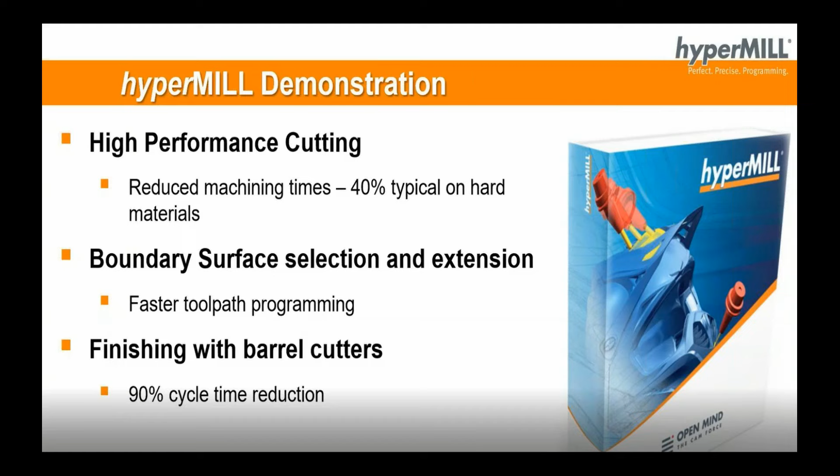Yeah, so today we're looking at high performance cutting. We're just going to be doing a couple of examples comparing traditional cutting styles with what we call our MAXX machining package with the high performance cutting. I hope you all can see my model on the screen. Square model, brilliant. So what I've got showing here in the middle, in this cavity, is a traditional style roughing tool, offsetting from the last boundary hit into a plunge point in the center.

Typically, with this type of toolpath, you get heavy wear on tool, you get rest machining loops, you get full width slotting. All these can have a real negative effect on tool and the machine. With this type of toolpath as well, you're generally quite slow on feed and speed.

You have helical moves into the material, which require axial forces going out of the materials. It's not ideal.

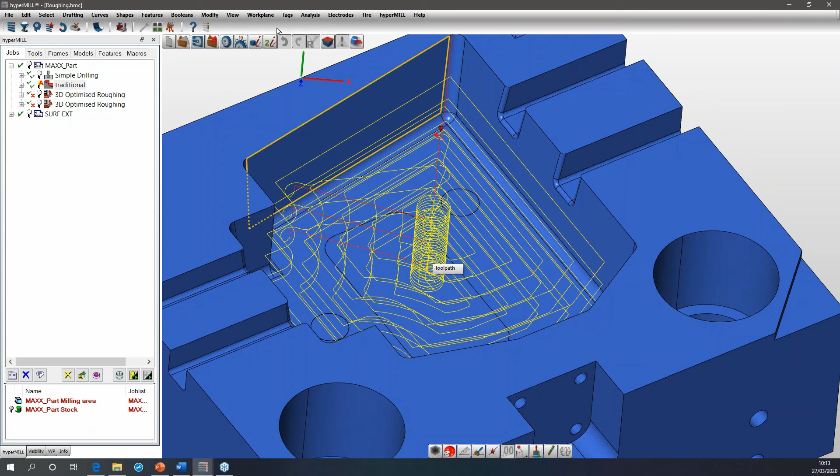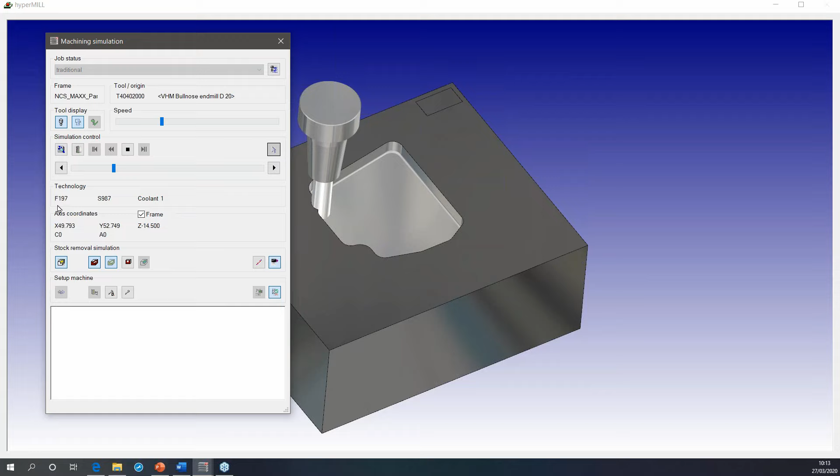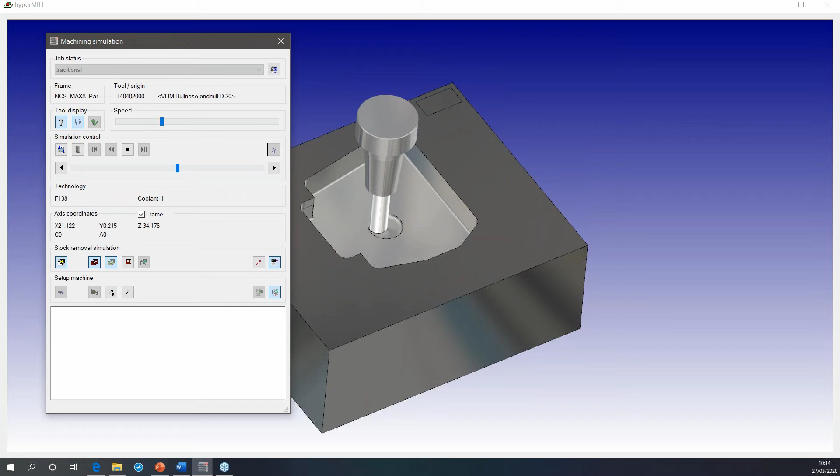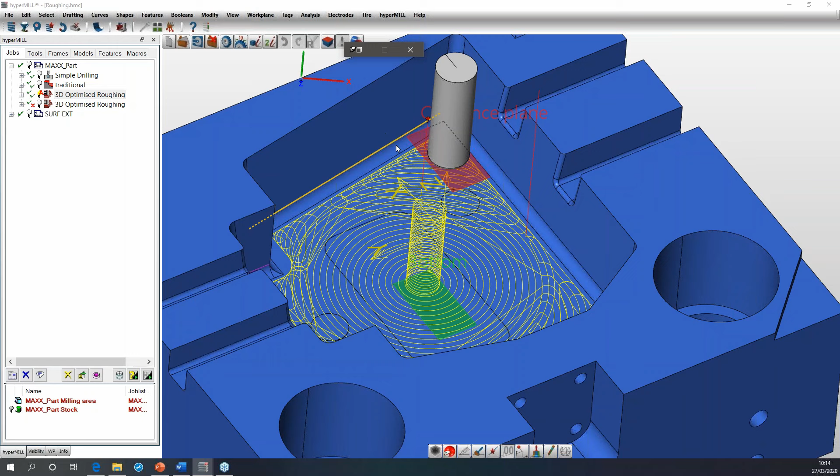MAXX machining in our cycles can be as simple as turning it on in the cycle and pressing calculate. So this will focus on producing.

Trochoidal milling has various benefits. MAXX machining is overall a better toolpath style, and it's far more consistent with the latest machinery capabilities. This style of toolpath has even pushed tooling to produce better geometries.

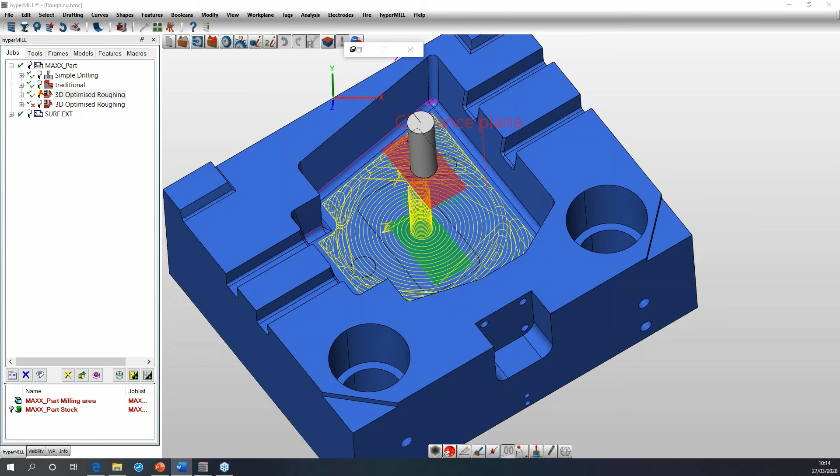The difference is we use feed rate adaptation compared to the traditional high performance cutting, which is varying engagement. If I look at this toolpath here, the big spiral opening pocket and dense area, I'm not changing the engagement into the material.

MAXX machining adapts the feed rate to maintain a constant metal removal rate. This results in constant cutting forces, which is the one, if not the most important thing in quick roughing operations, the removal rate.

This not only produces constant machine loads, but can uniform the chip thickness. Uniforming the chip thickness can result in excellent heat evacuation into the chip instead of the tool. So we're gaining on tool life here.

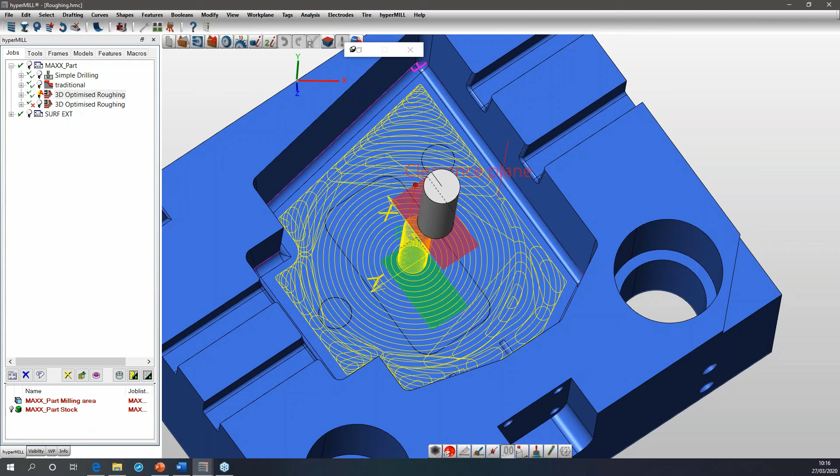This style of toolpath is changing the way we machine. Combined with the constant feed rate, we are adapting the toolpath to use the full flute of the tool. Using the full flute of the tool produces a much nicer scenario.

We are entering grounds of using side radial load much closer to the holder. That, combined with a full depth of cut and a low radial engagement, produces a better scenario whereby the surface speed and even feed per tooth can be ramped up substantially,

while keeping the cutting forces low to maximise tool life. High performance cutting paths from hyperMILL will generally have an overall shorter tool path, and you're machining the material faster. So it's win-win all the way around.

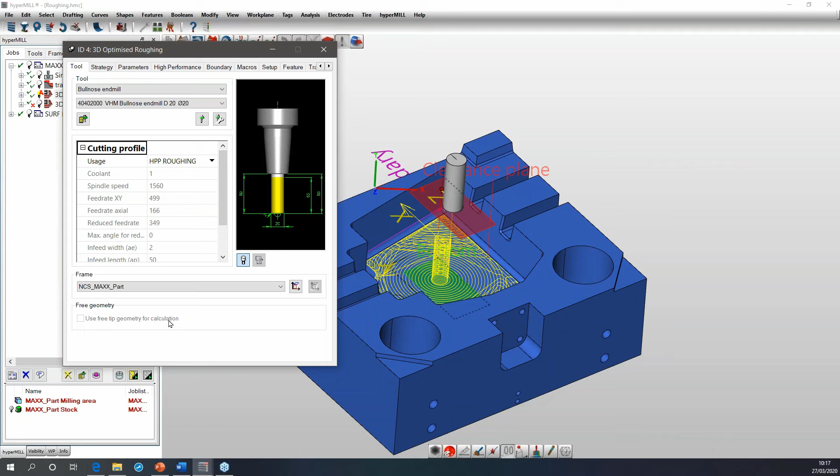So if I was to simulate how the material is removed using our high performance, okay, in this particular scenario, I still do have a plunge, but that can be removed. I can pre-drill a point.

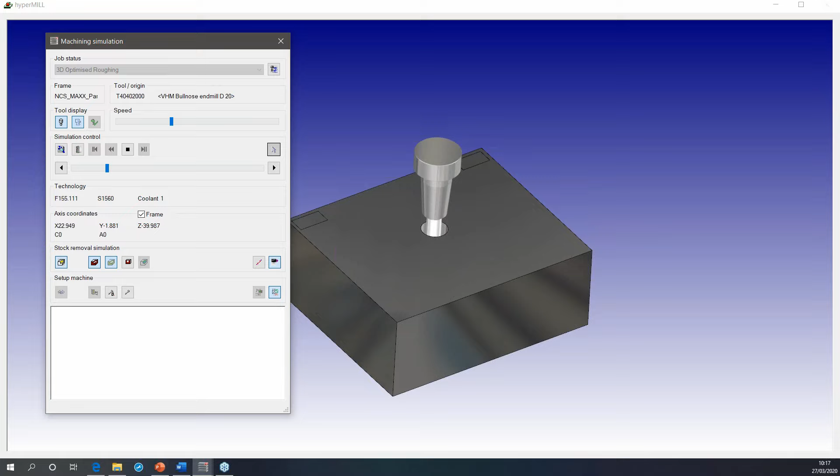So I'm using the full length of the tool and it's spiraling out, maximizing the flute length of that tool. So you get an equal wear, you're getting the most out of the tool possible.

You can see the feed rate is constantly adapting to suit the scenario. There's a real nice function whereby as it's entering the material, it actually slows down so you do not shock the tool. That's very important when you're machining hard materials.

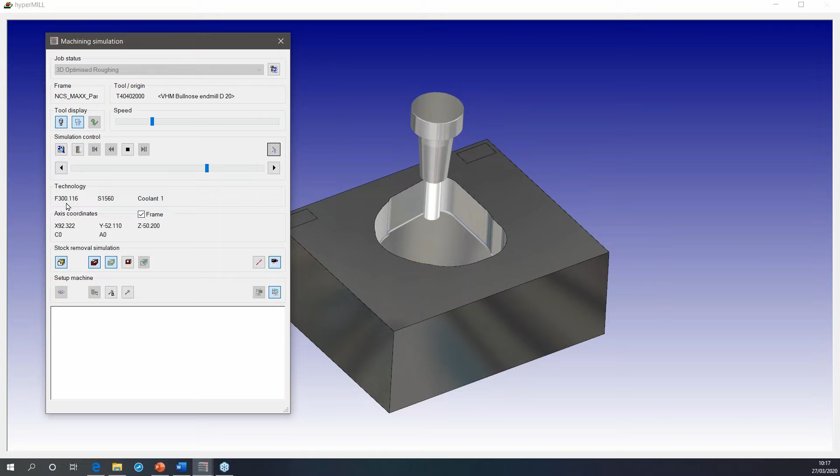Once it's engaged into cut, it then speeds back up. So this is feed rate adaptation on engagement.

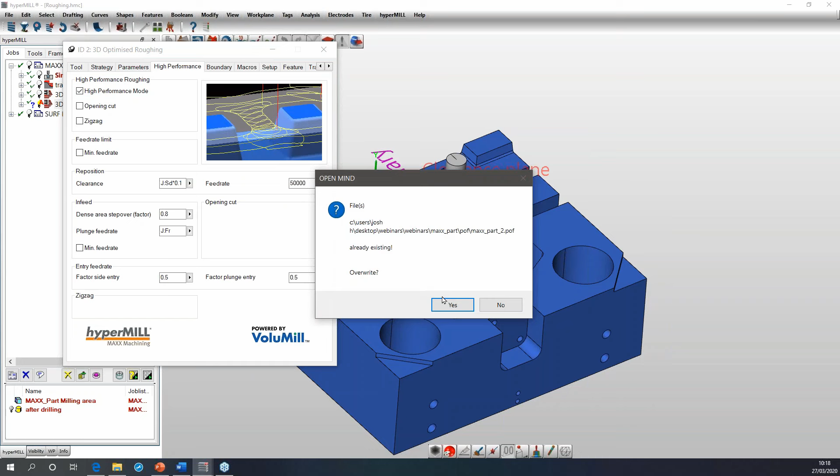In this little pocket here, I did set up an example as well where actually I did pre-drill a point in the middle and used high performance there, which also produced better gains, and I'll show you the difference in a moment. Okay, because this is the nice way to get this set up.

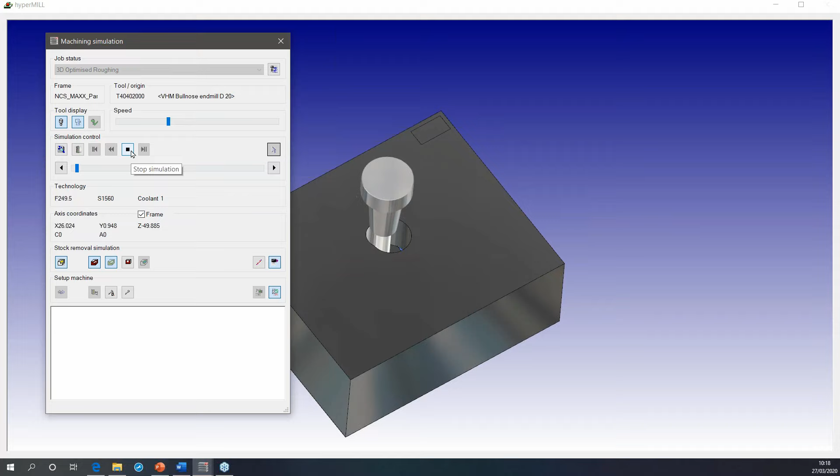Okay, so with this toolpath, I've already pre-drilled a hole. Maybe use a U-drill, something smaller. That means I can plunge straight to depth and I do not get the helical move, and I'm straight into the trochoidal. Really maximizing what that tool can do.

So I'm just going to show statistics wise. Now this is using recommended speeds and feeds for the traditional toolpath: 52 minutes for this pocket. Granted, it's quite a large pocket.

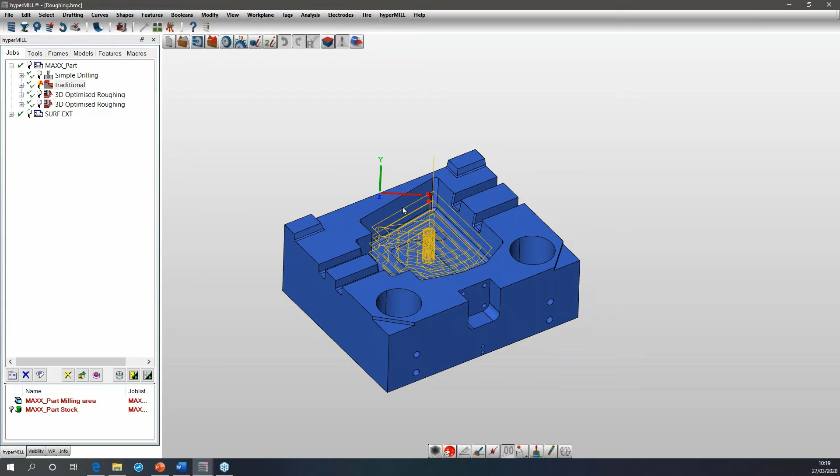Okay, and I'm treating it as stainless, so yeah, there's going to be... here we go, it's a 160 odd mil pocket. So 52 minutes to rough that out.

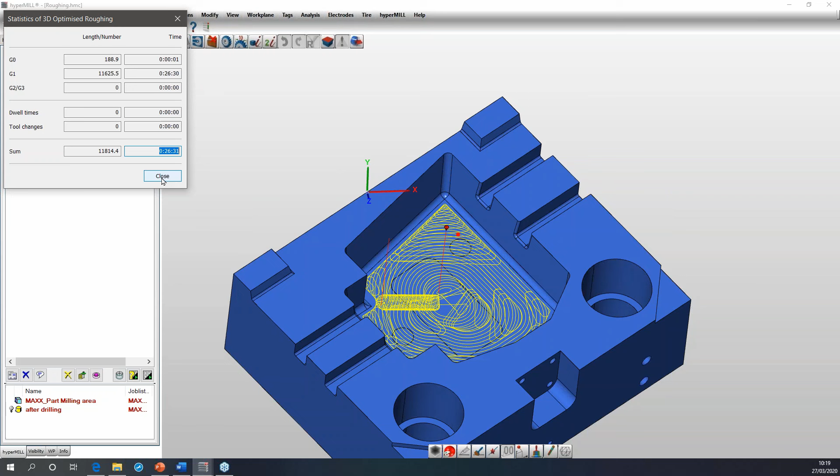Using high performance statistics, over 50% less time in that pocket. 26 minutes now, 26 and a half minutes cam time. So huge advantage there. Plus, not to mention, nice scenario on the machine.

It's lower cutting forces, and you're utilizing the tool better. There's geometries out there now from several manufacturers that have real specific designs and helix angles on these tools and chip breakers that really do optimize and allow you to achieve faster surface speeds.

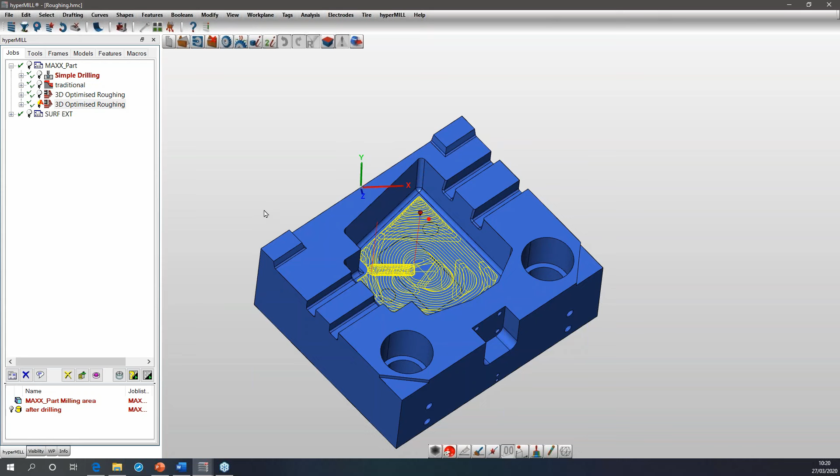On this example here, the traditional style toolpath, we were running at 62 surface speed and 50 microns per tooth. For the trochoidal, I can run at 98 surface speed and 80 microns per tooth.

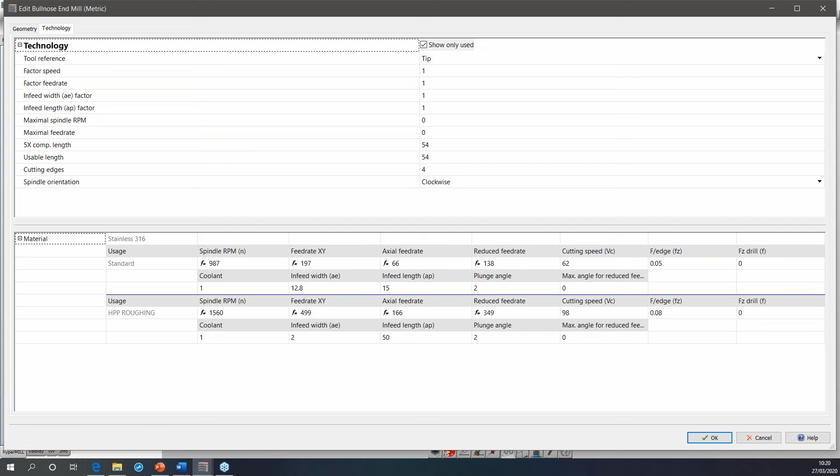So that's a factor of 1.5 times on VC, and over 2.5 times faster, more metal removal on the FZ, the feed per edge. So massive gains to be had there.

This style of toolpath was originally developed for hard materials, but it can be utilized in softer materials as well. Tooling is allowing that scenario to happen now. The original idea of this high performance MAXX toolpath was for harder materials, but tooling geometries these days are really enabling us to use this MAXX machining in all areas, which is quite nice.

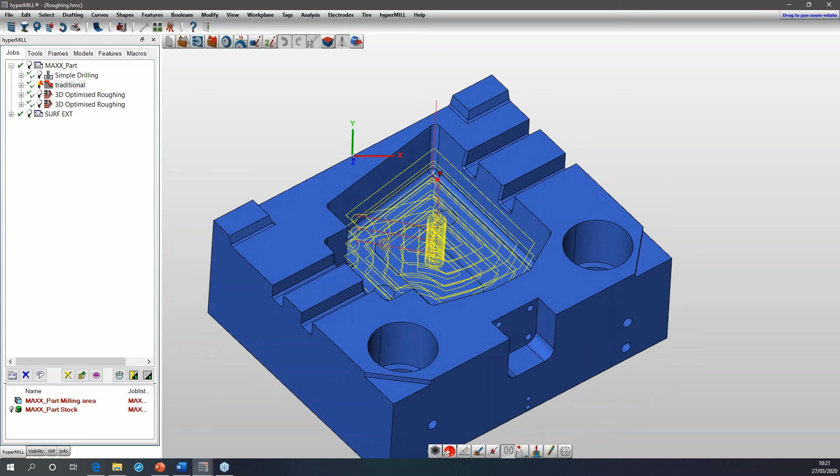Okay, I'm just going to move on to a slightly different aspect now. I'm going to use the same part for now, just because it's got a nice little section on it, and I'm just going to focus on these slots.

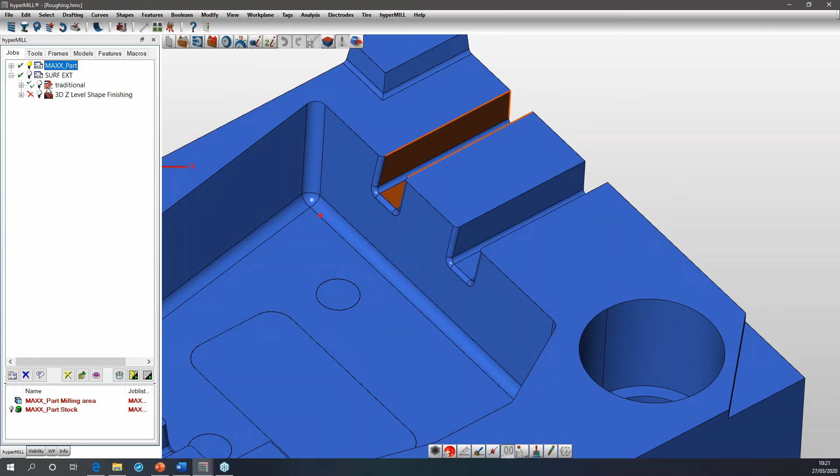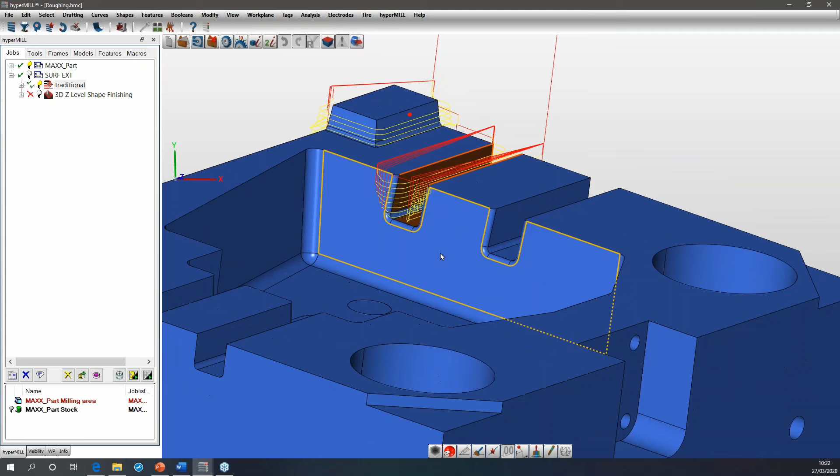When we're doing Z level or constant Z based cycles, you get typical scenarios whereby in this open slot case, the tool will naturally want to wrap around the edge. You get this wraparound, and it's unoptimized. If you had a stock scenario inside that pocket, that's going to be gouging in, causing pre-machining to occur.

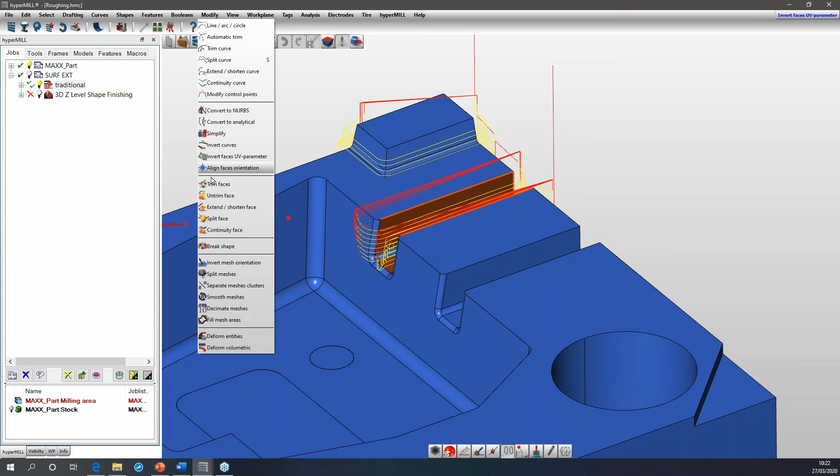Takes time, takes effort. We do have tools, of course, that can help. We have our extend and shorten face command, which is a real nice solution for extending the surfaces out, and it can eliminate the wraparound.

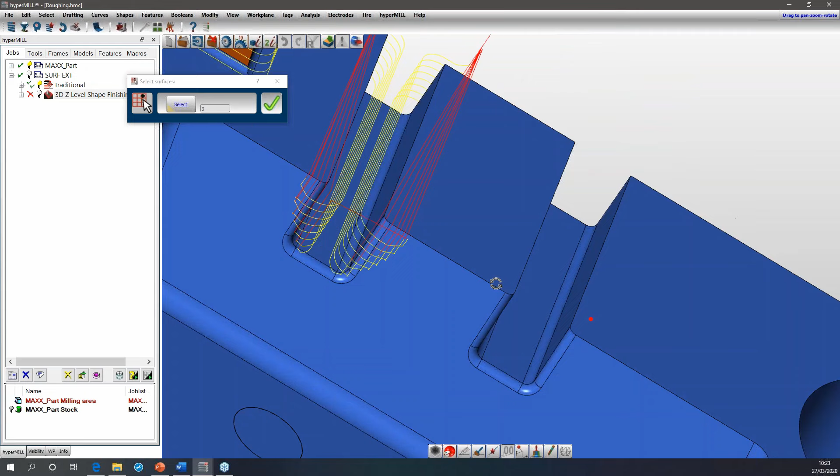But HyperMILL cycles are developing rapidly, and we have options in our cycles now where we actually get automatic surface extension occurring. We are bringing HyperMILL functions into the cycle for an automated result.

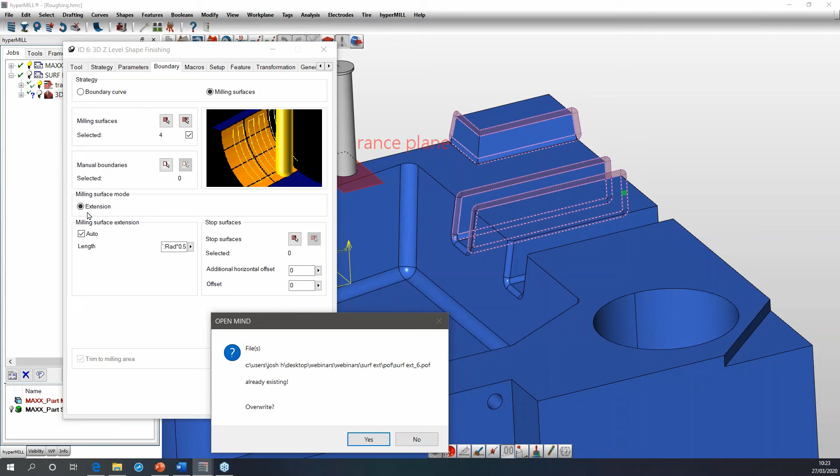Quick, simple, saving time. If I was to just press calculate on this now, a nice thing here is I've actually, instead of creating boundary curves and controlling the tool using boundaries, selected milling surfaces. I've said, just mill these surfaces. Through that selection, I've got an automated surface extension, done by a formula. This allows several types, all types or sizes of tool to achieve the same result.

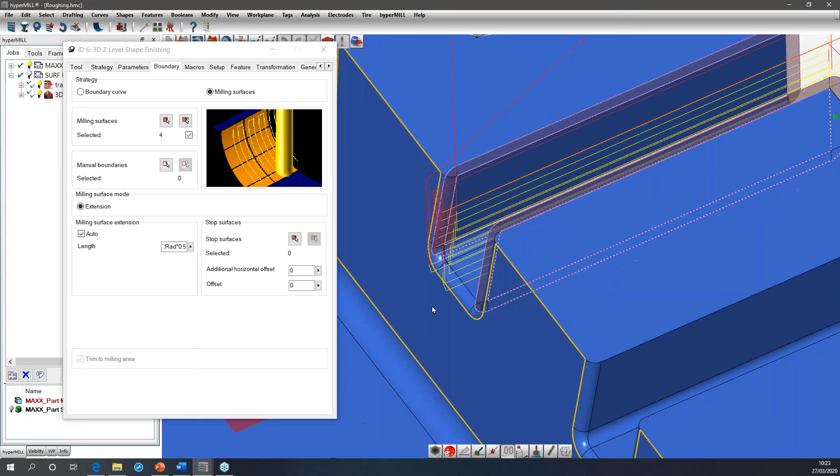So you can see now with that surface extension, optimized tangential entry and exit out of the material, no wraparound. Really nice there. And that's just an option - you just pick your surfaces and hey presto, milling surfaces mode done for you.

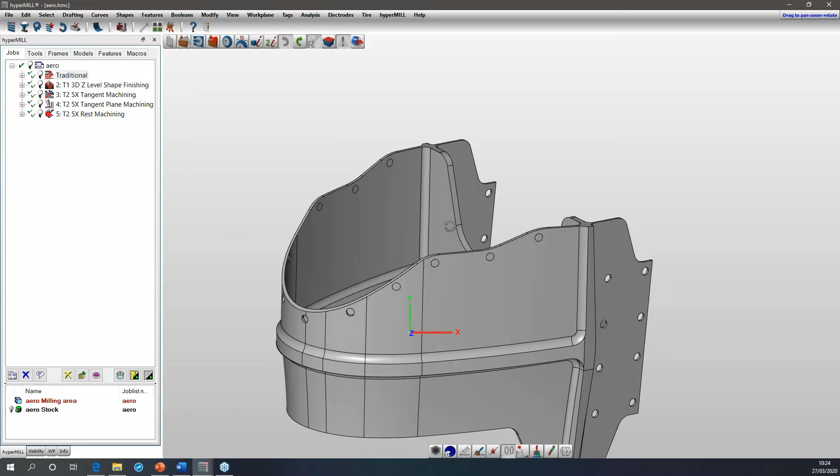Marvelous. I've actually got another scenario for this. Now this is obviously quite a hefty part, but I'm just using it because it shows the power quite well.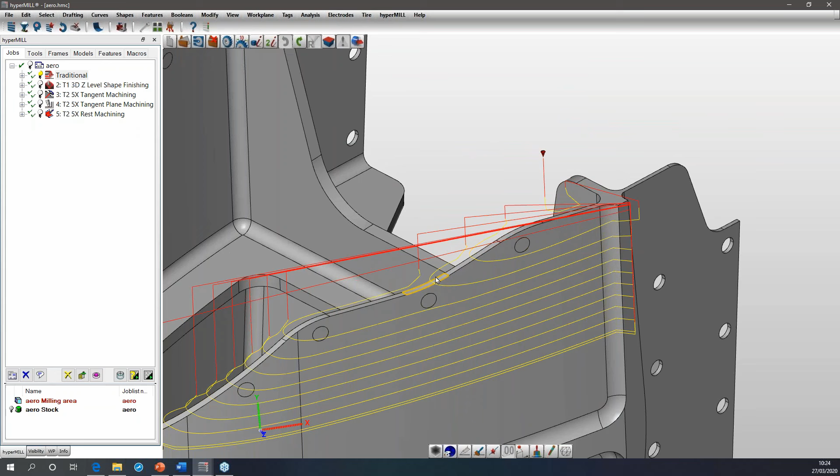Z-level style toolpath down this cylinder. You get the wraparound over the top. Yes, you could offset the top face a bit and stop it rolling over, but this is all time and effort. This is all being controlled now within the cycle.

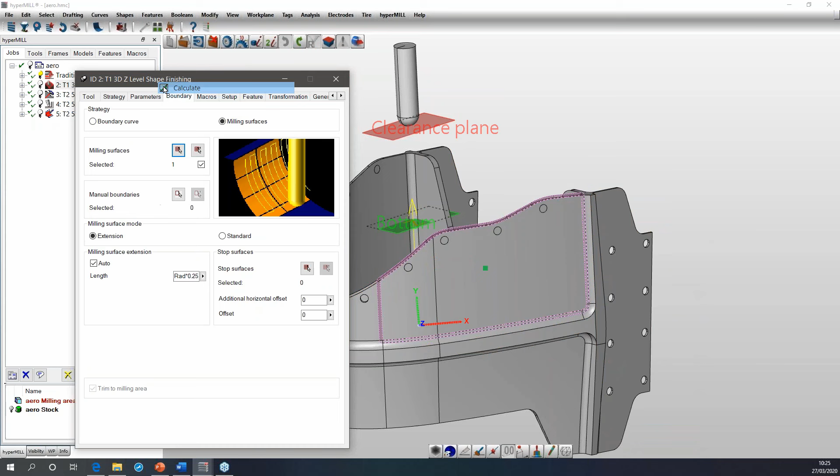I select my face that I want to machine, press OK. I get my surface extension all the way around. I press calculate. Now I'm using the same sort of step overs and whatnot as the previous toolpath, but you can see it's completely eliminated the wraparound in this area. So again, really nice, powerful solution here.

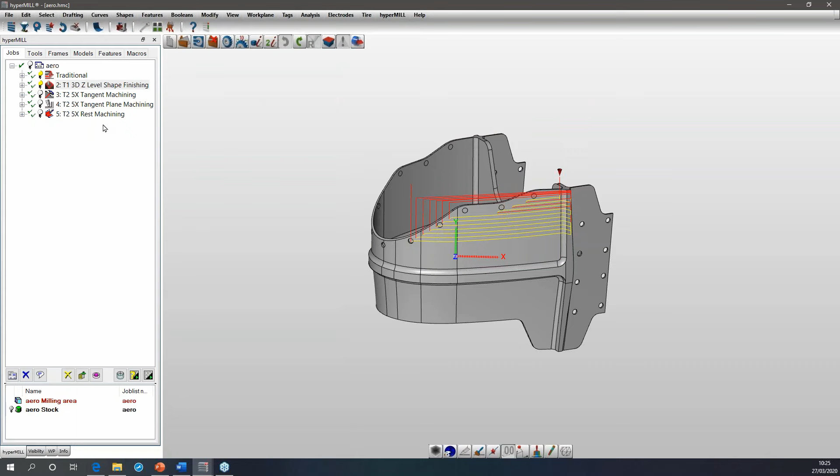So it's not just for Z-level areas. We do have the availability also in flat area machining, so the profile finishing side of things. Traditionally, you get the tool rolling off the edge.

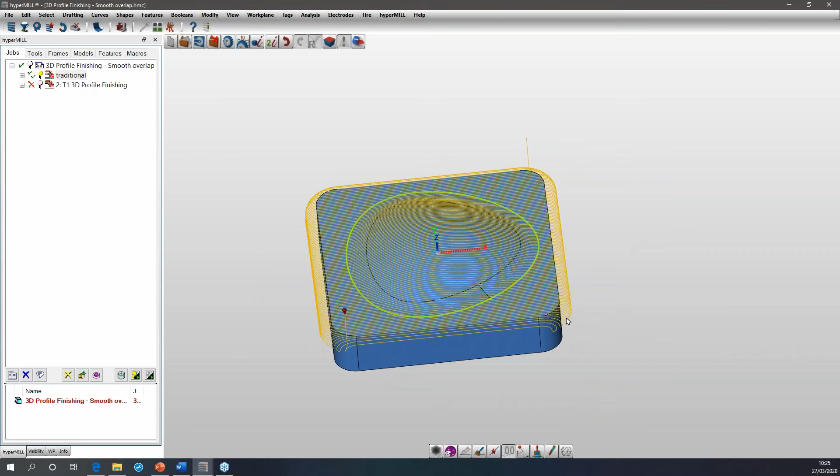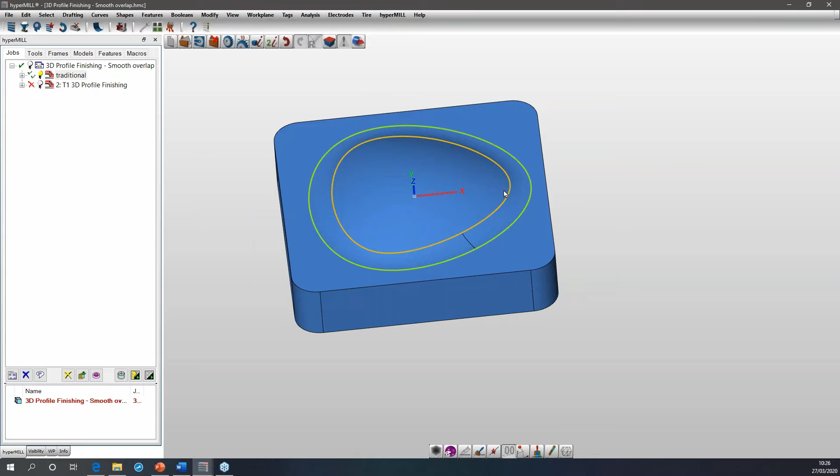To stop this, you could set a boundary, but if you set a boundary to the edge of the surface, you're entering grounds of the machine speeding up and slowing down, doing step over all on the part, which you can improve certainly in open areas by having an extension off of the surface that you're machining. You get much better edge behavior, and you're maintaining surface speed correctly when you're milling those surfaces.

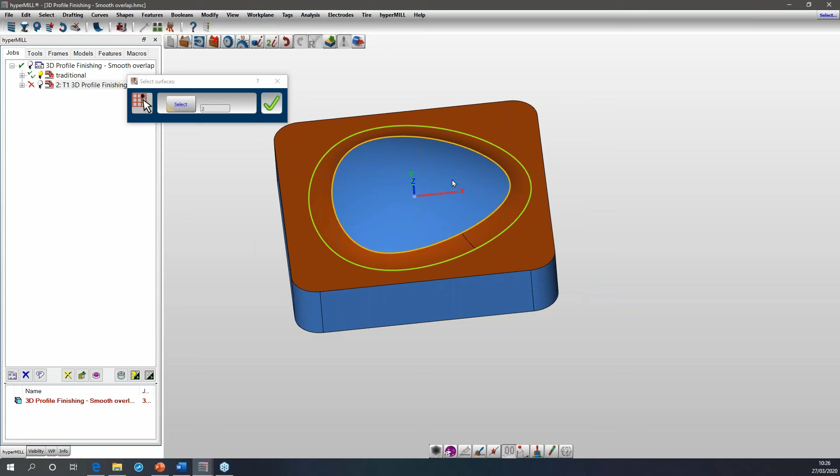So again, we have a nice scenario where I can use milling surfaces for my selection. I can say, yeah, I want to mill these surfaces, okay. And instantly, automatic surface extension, I've placed it all around the edge. And if I calculate, you really see that extension covering that area really nicely.

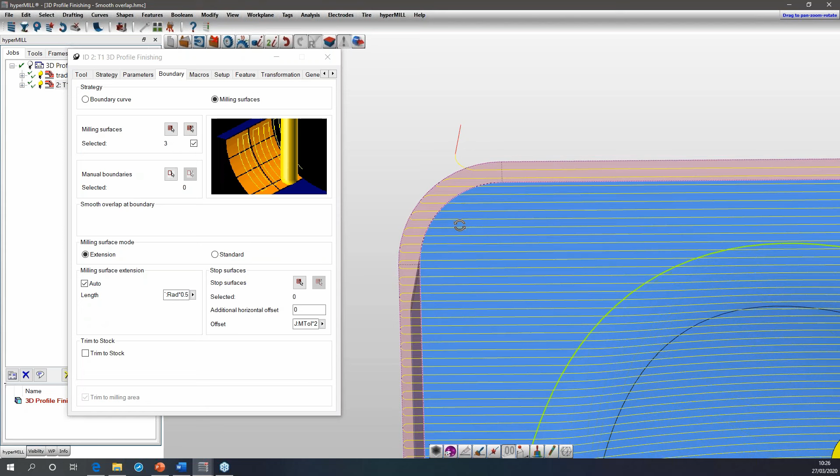I'm starting off the job. This also helps, you know, when you're doing 5-axis machining, when you're taking the tool off, it just gives you proper lead onto the material, exiting the material properly. Really nice result there.

Okay, just wet the whistle a second. Okay, so...

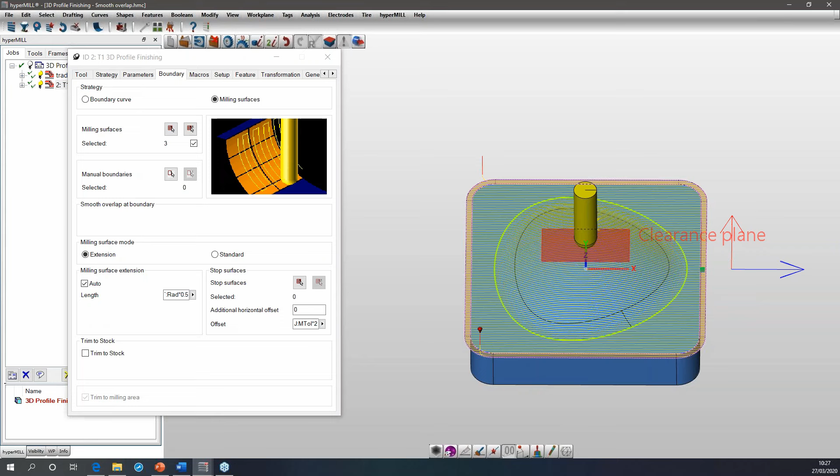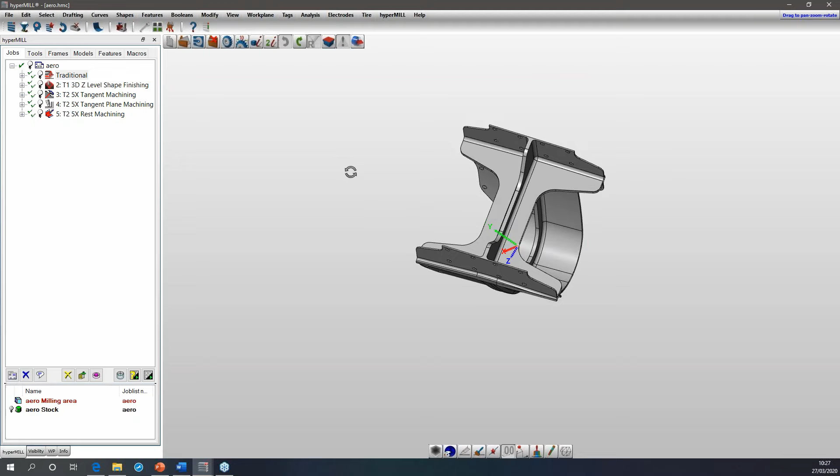Yeah, so a number of cycles have this surface extension, including the barrel milling. Ken mentioned the barrel milling earlier, and I'll come to it shortly. But I'm going to return back to this part and focus really on where you use barrel tools. Barrel tools are there to help us machine hard to reach areas - tight corners, deep pockets, things where your ball mill or end mill would essentially have to be sticking out substantial amounts, and you're getting an unoptimized result because you're going right on the tip of the tool, and you're getting push off, vibration, that type of thing, and tight corner areas where you really start having to step down the tool size.

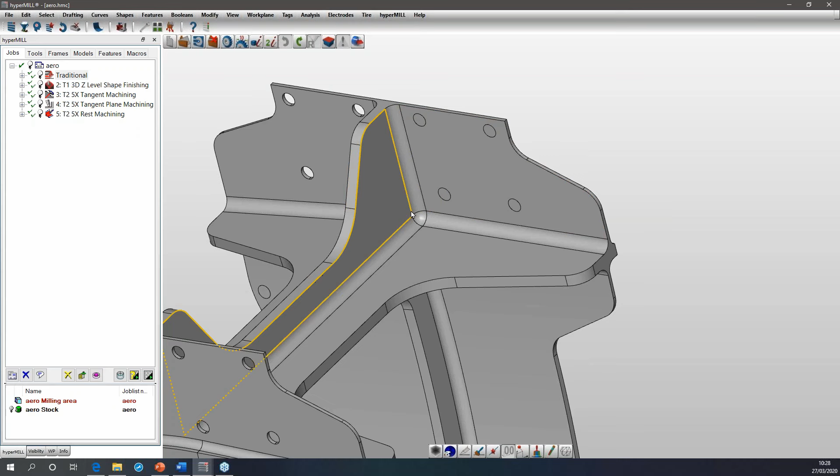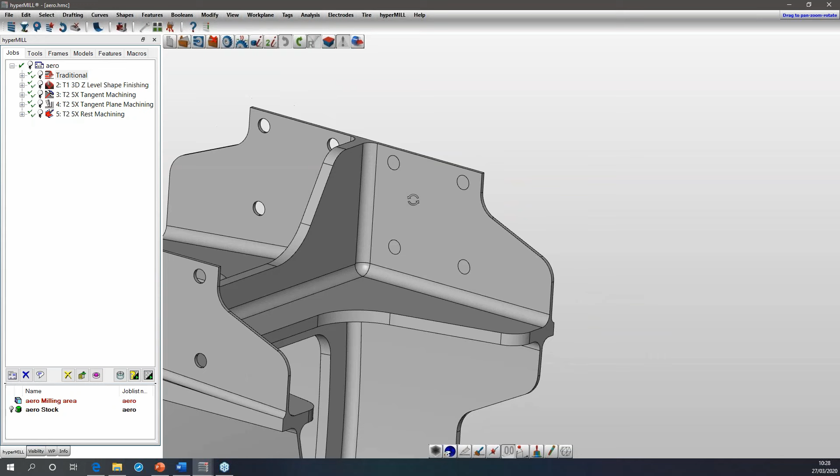So we've got a scenario here where I've got a little 4.2 mil radius corner, thin wall section on this aerospace part, and a quick measurement of how deep I'm trying to go - roughly 55 mil for an 8 mil tool. So yeah, you'll be getting maybe a bit of push off on that. We want to look at...

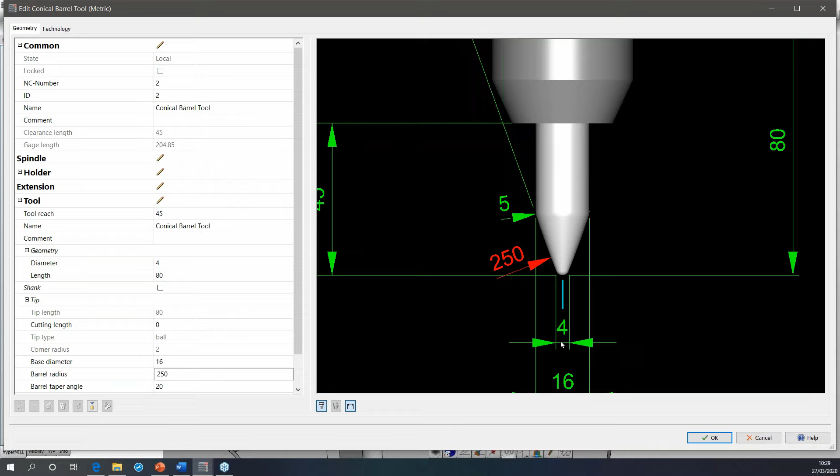Tangent machining - our tangent machining is utilizing conical barrel tools, and you're looking at using this large barrel radius edge. Now this contacts the part with quite a large engagement. It's a massive radius. So using 3, 4, 5, 6 mil step downs, honestly you cannot feel the difference. It's beautiful results. And because we've got a small ball on the end, we can utilize that for finer detailing. And being tapered, we can achieve much thicker shank, much shorter stick out of the tool, so optimizing the result in every aspect.

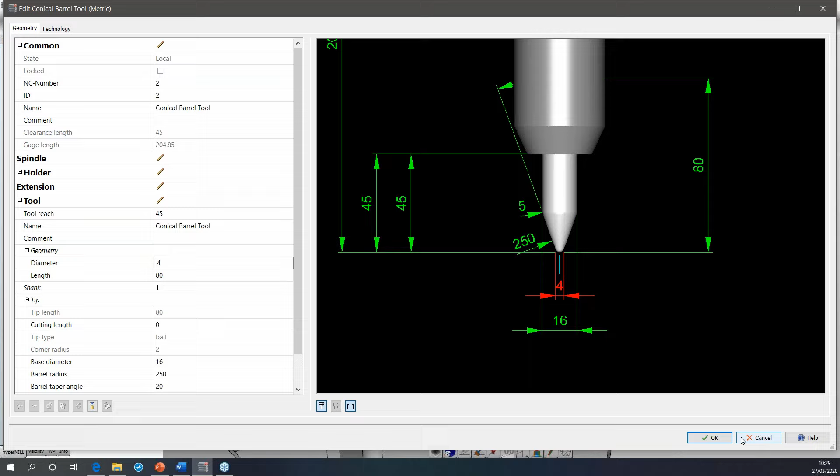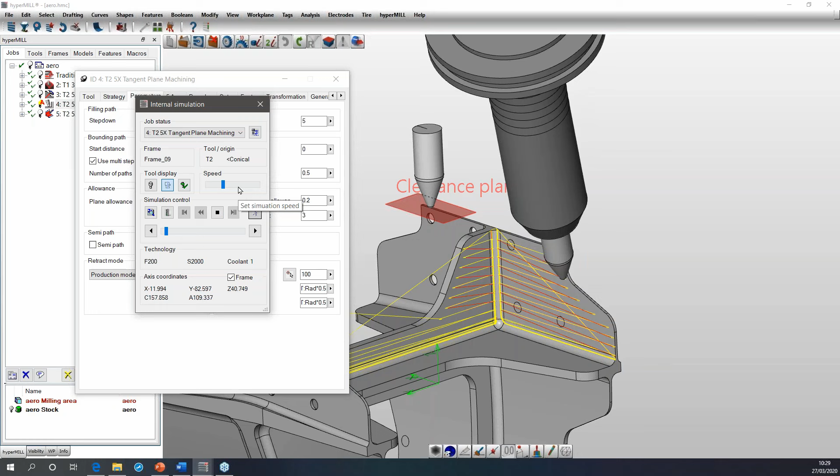Compared to a standard ball nose - standard ball nose in here, you'd be scanning maybe a 0.1 mil, maybe 0.2 step down for this. In this cycle, we're honestly really achieving a 5 mil step down, and it will produce lovely, lovely results. And because you've got a thicker shank on the tool, shorter tool holding, speeds and feeds are increased. You can ramp it up. You start taking and pushing the machining to its limit. With ball noses, you're limited not only by spindle speed and whatnot, but by the stick out that you have to have and the vibration.

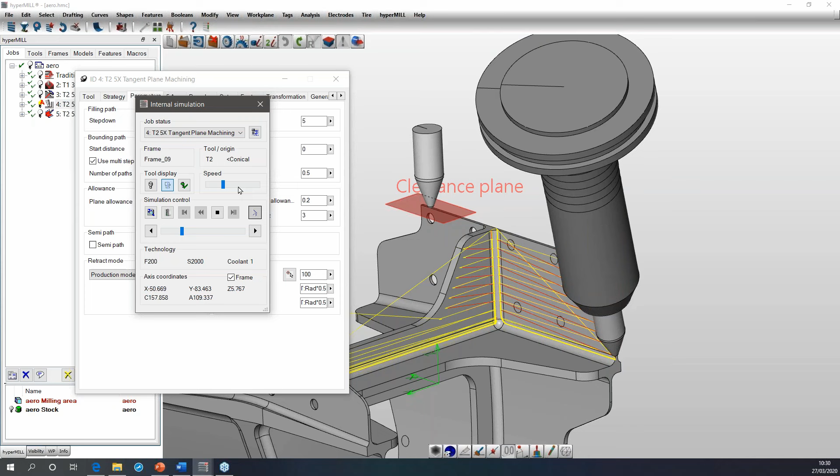So something nice happening right now - this is bounding toolpath, something specific to hyperMILL. You do not get it anywhere else with barrel tools.

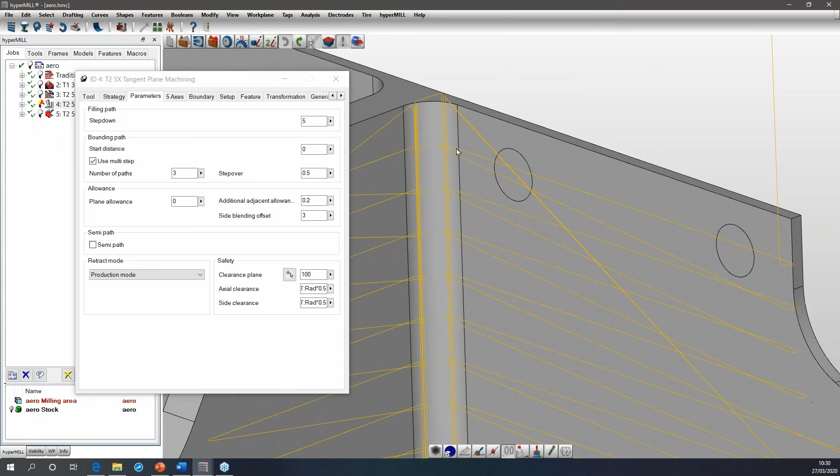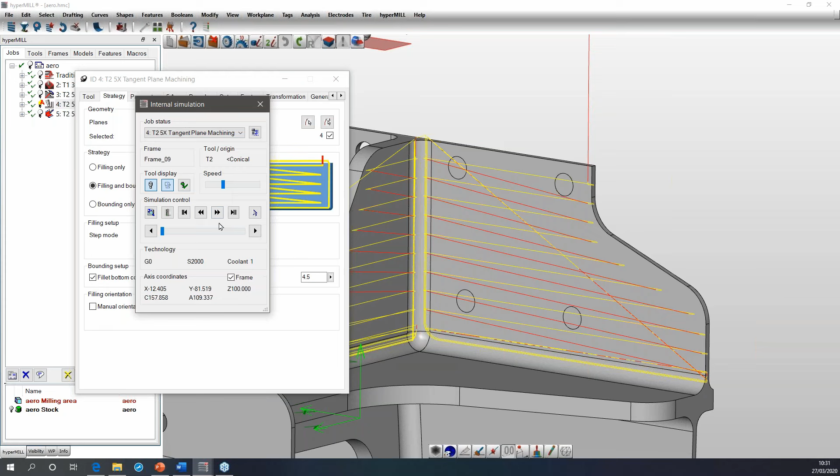Typically, when you're machining the plane along here, in this corner right now, it's going to leave a tiny little wedge of material. It's like you can feel it, you can see it, but it's nothing substantial. But that typically has to be removed in secondary operations. We've actually got very easily - you pick the bounding curves of the surface that you're machining, and we get the automated fillet bounding path that clears up that step.

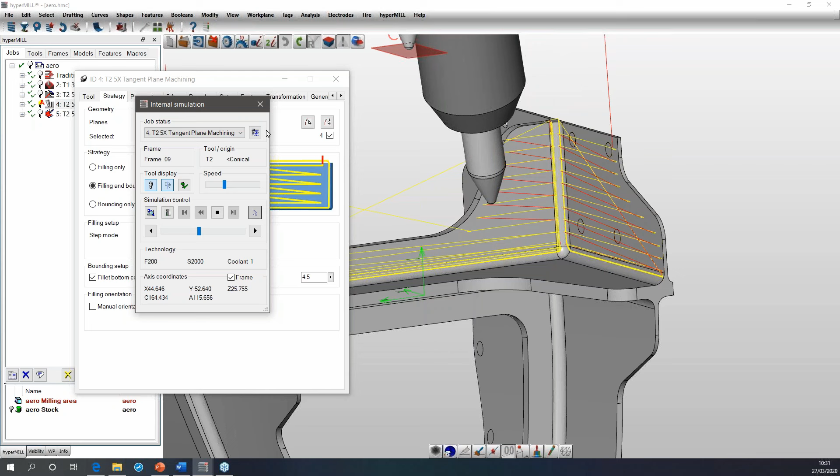So just run that down through here. And you saw the angle change of the tool there - it adapts to suit the scenario. So this is, I think I've done a 16 mil shank on this tool, and you're getting into tiny little tight areas, corners. It's something incredible. It really is.

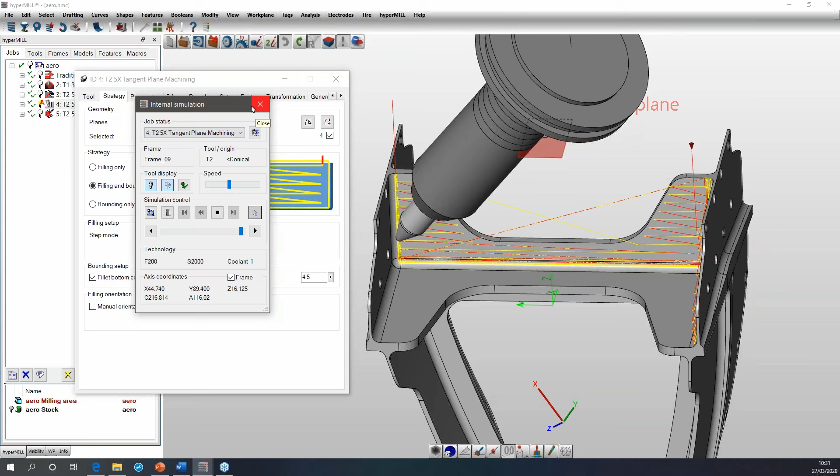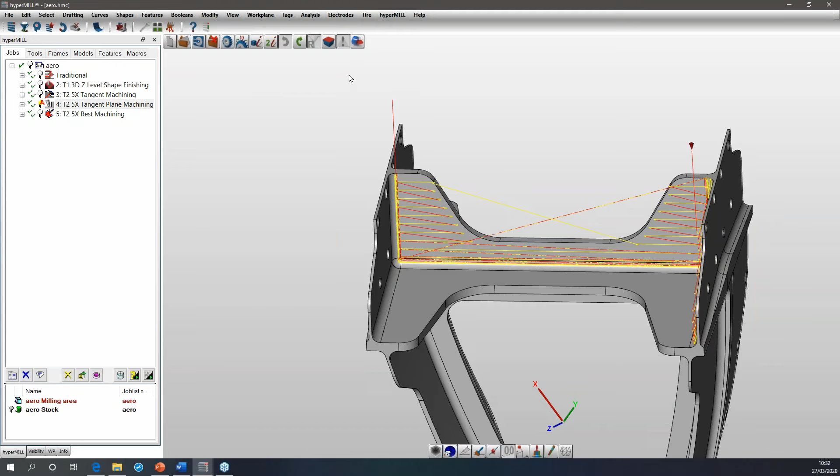But it's not just planar surfaces that you have to do - you can do freeform surfaces. And these geometries are becoming much more difficult, complex to machine. Certainly in the medical industry, I'm currently doing a part where I'm doing a medical knee joint, and these sort of complete freeform surfaces - but with barrel milling, we're looking at massive, massive gains compared to the conventional ball nosing of these surfaces.

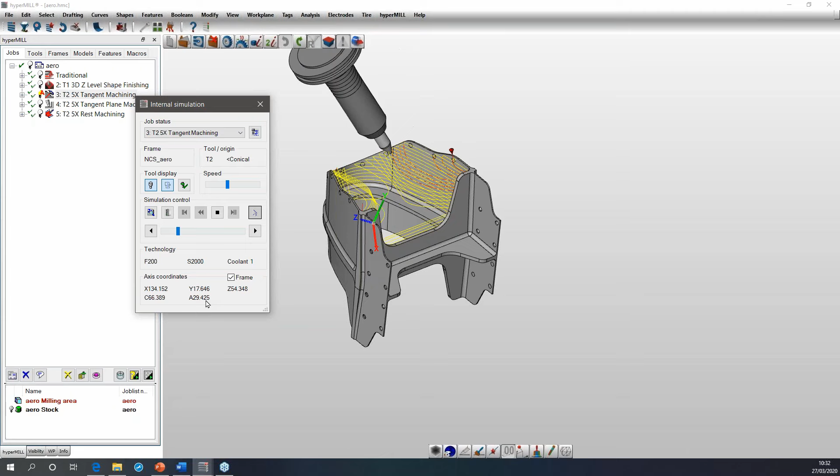I have a scenario on the inside where I'm using the same barrel tool to machine all the way around these surfaces, and hyperMILL does a very good job in limiting the amount of axis you need. Just because it's a 5-axis cycle does not mean it will use all 5 axes at the same time - it only uses it when it needs it. Machine stability is a massive control. It always looks great on CAM, but when you put it on the machine, you think, what's it doing? We do a very, very good job in only using what we need.

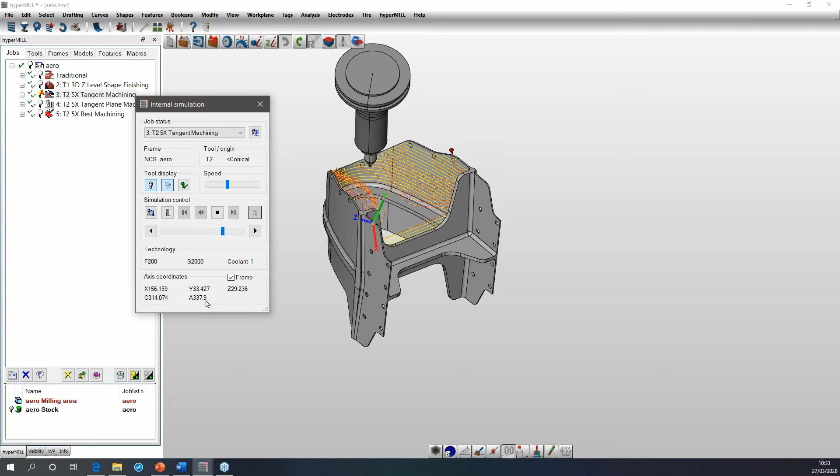So really deep wall pockets here, completely collision checked, lovely result in there.

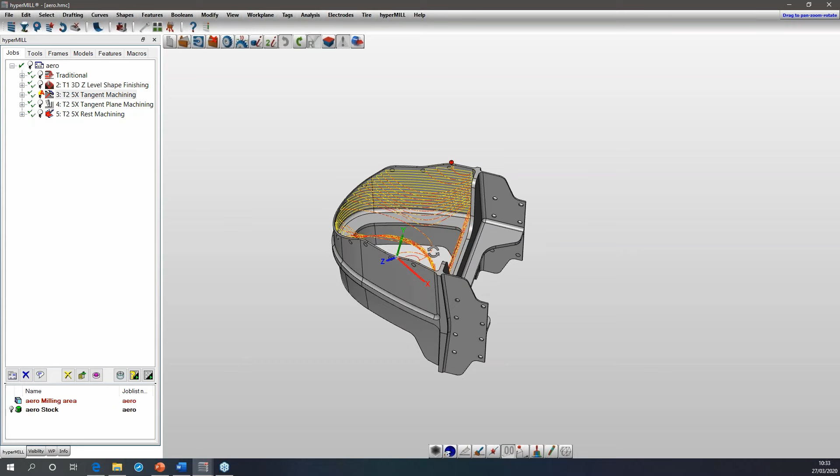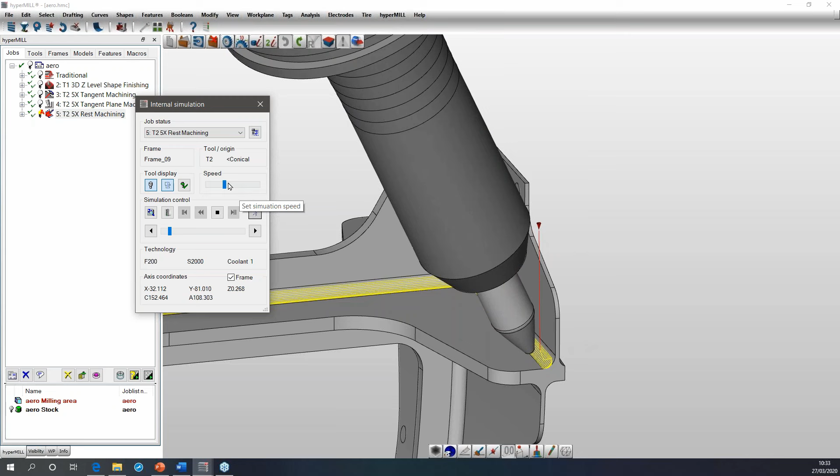I have a question about - I mentioned the ball of the barrel radius earlier. You can implement it, okay? I've added in some passes using the barrel mill, but I'm now utilizing the ball, not the major radius. So you can start to tickle out these corners and radiuses all using the same tool. So you're utilizing all of the tool here, and again, lovely clean results going on here.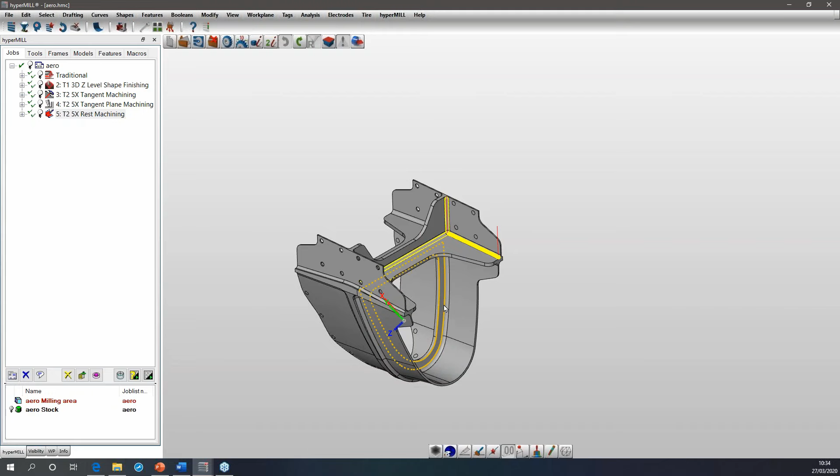Josh, we've had a couple of questions come in while you were presenting. There's a question on the barrel cutters - they look really interesting, and who sells them? Where can you get them?

A couple of tool providers supply these. To name three, we've got Emuge-Franken, and Quick Grind in the UK. They're really good for getting custom sizes, because barrel tools come in all shapes and sizes. They have their standards, but standards don't always fit the requirement, so you sometimes need custom geometry. Quick Grind and Seco Tools are great for that.

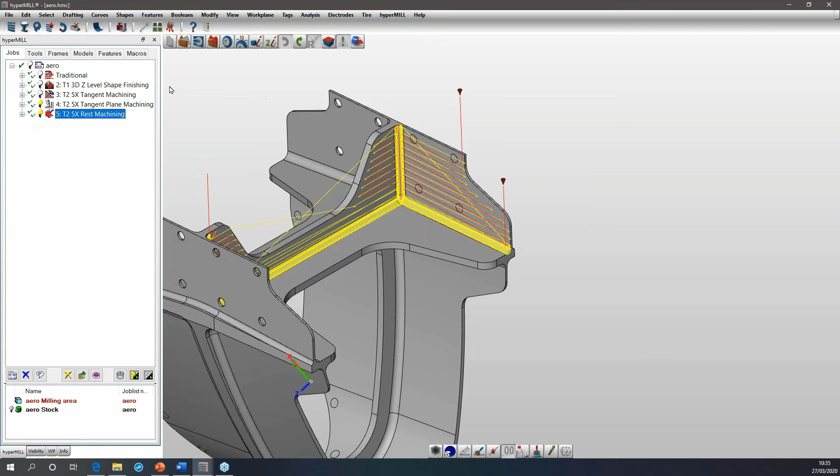There's also a question - can you select multiple surfaces, or do you have to join surfaces together before using them? It does depend on the geometry. For instance, in this scenario, if I was trying to machine that surface, the tool would naturally want to retract at the hole and come back on, but this is an unoptimized result.

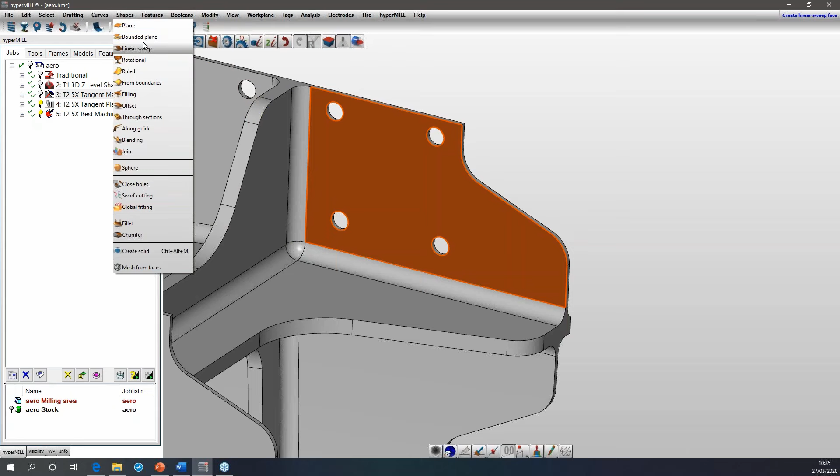So here I've quickly drawn in a bounded plane which just covers this area, and I can machine to that. You just select that surface in the cycle.

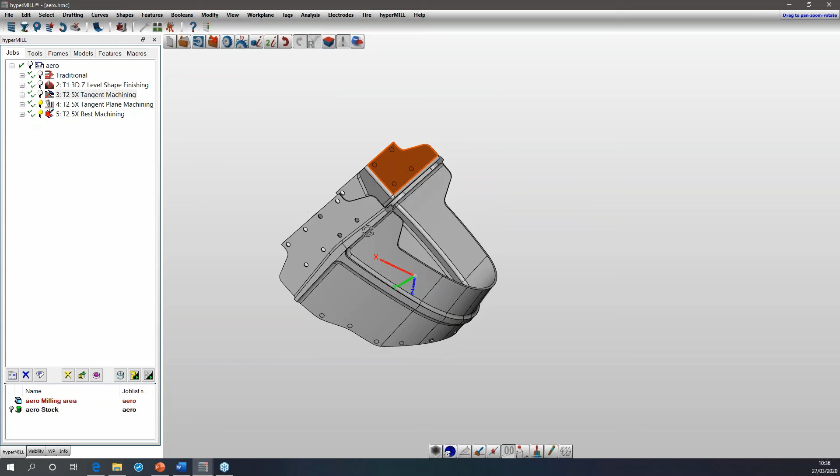When you're talking about joining surfaces, let's look at this pocket here. These are all separate surfaces that I've manipulated quite easily and joined into one surface. You can also go across surfaces separately.

If I open up a separate scenario that I've got hidden away - we have several scenarios on this part where we've got one nice surface, one nice surface, one nice surface - a patchwork quilt.

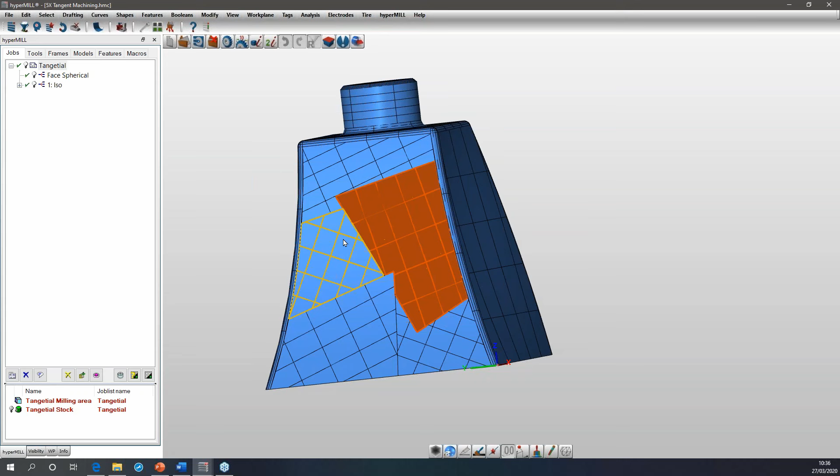This is somewhat a difficult scenario to deal with, because even if you're scanning these surfaces using a surface-based cycle such as ISO machining, each surface has a different ISO orientation, so you get patchwork quilt machining.

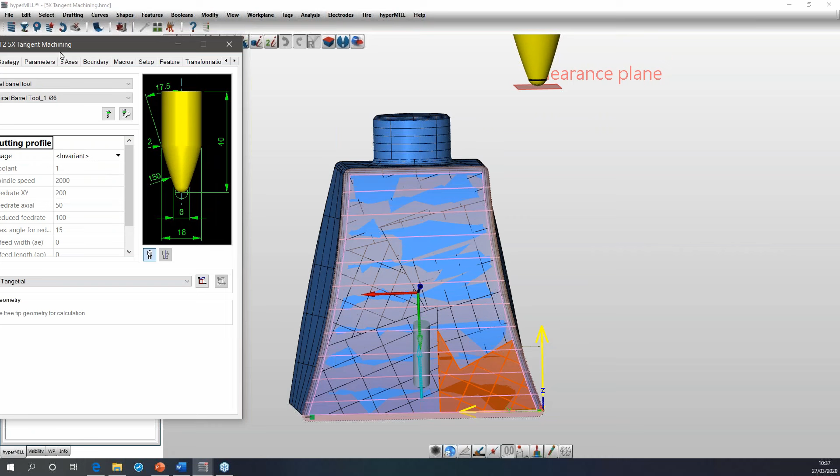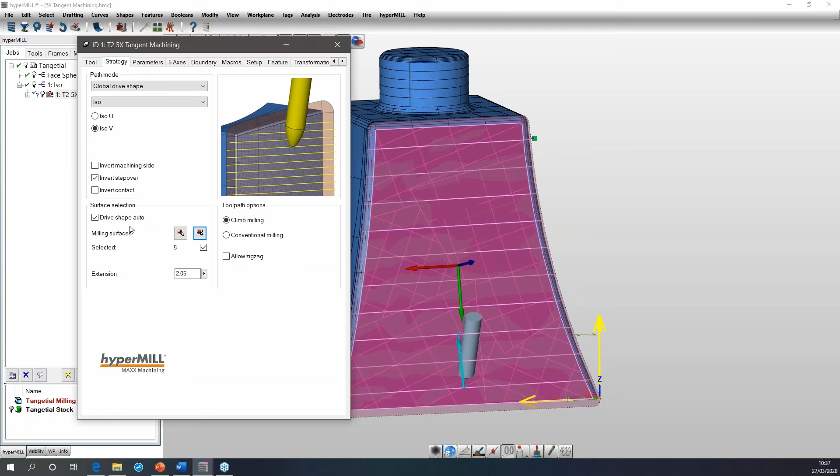Something really nice in tangent machining is actually a CAD tool as well, called global fitting. We've integrated that technology into a cycle whereby we can say, look, I'm trying to machine all of those surfaces - they're all going different directions, but I need a drive surface. This cycle, tangent machining, utilizing the barrel tools, is doing that for us.

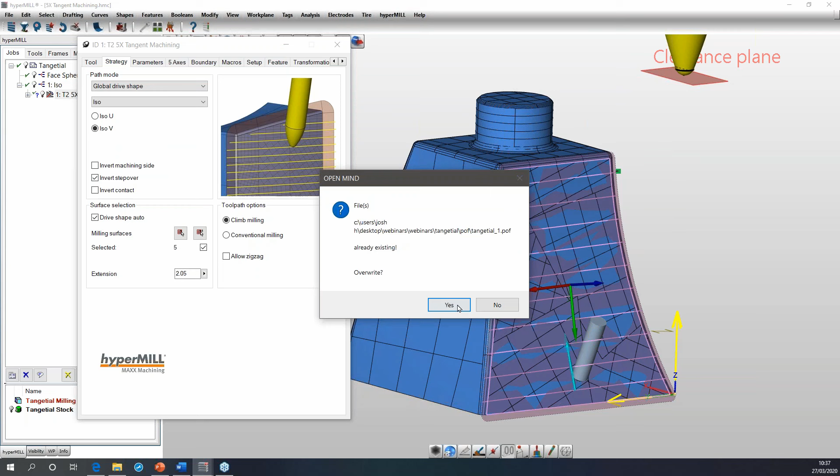I get my surface extension, and I get to choose whether I'm running along the surface or down the surface. If I just press calculate on that - it is as simple. I've picked a tool, I want the global drive shape because that's the function that gives us the utilization of normalizing my ISO directions, and it's got automatic drive shape extension.

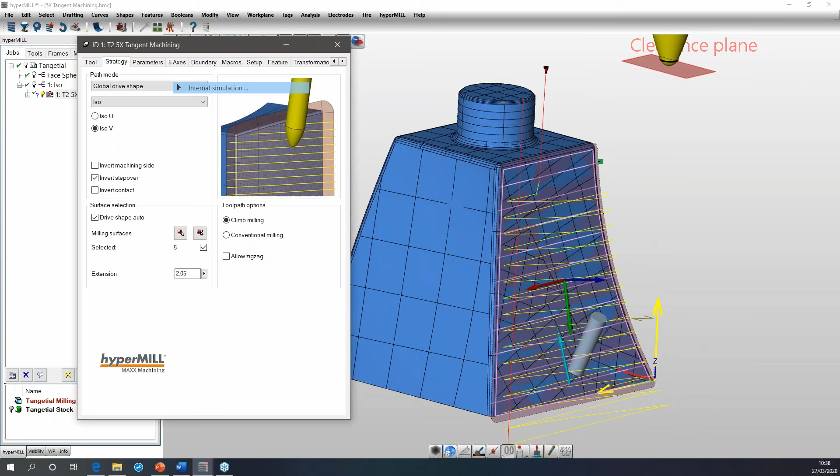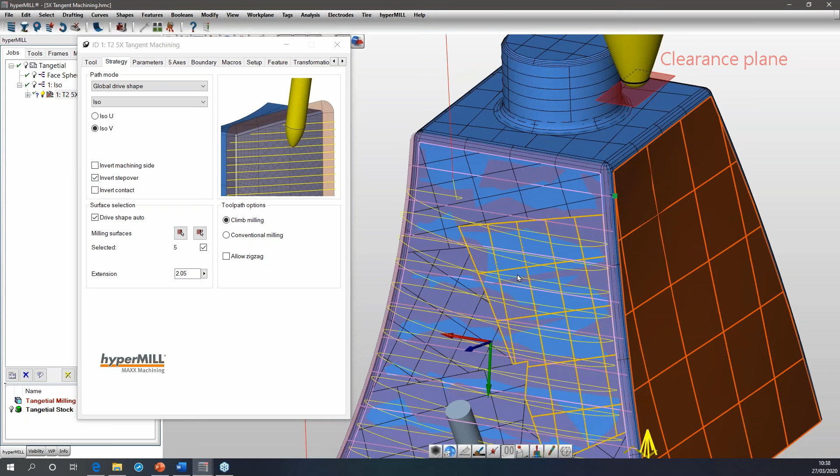So now I'm really utilizing that barrel in a really nice, efficient manner. To answer your question, a lot of the time you can get around different surfaces, multiple surfaces, in one operation - you don't have to machine them individually. We have the power to globalize the machining direction over those surfaces, treating it as if it is one surface, by utilizing the global drive shape function that's automatically implemented into the cycle.